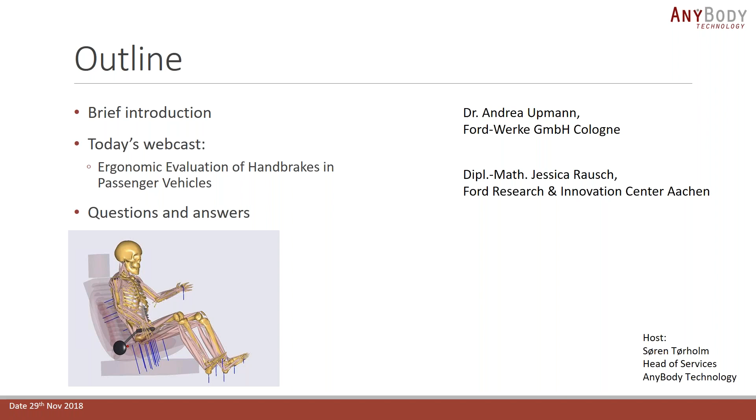But first a little bit of introduction to AnyBody. It's a tool for musculoskeletal simulation, and what goes into this tool is the motion data, the kinematics, the forces. And what comes out is the body loads, the joint moments, the muscle forces, the joint reaction forces - very detailed information on what goes on inside the human body.

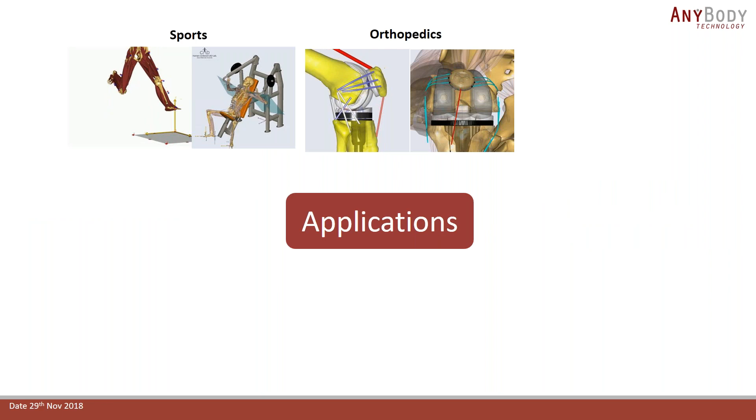And this can be used for all sorts of applications. It can be used in sports, orthopedics, universities. It can be used, as you will see here today, in automotive, aerospace, assistive devices, ergonomics, and consumer products. So really all sorts of fields where, but what in common, of course, is that we do analysis on the human body and its surroundings.

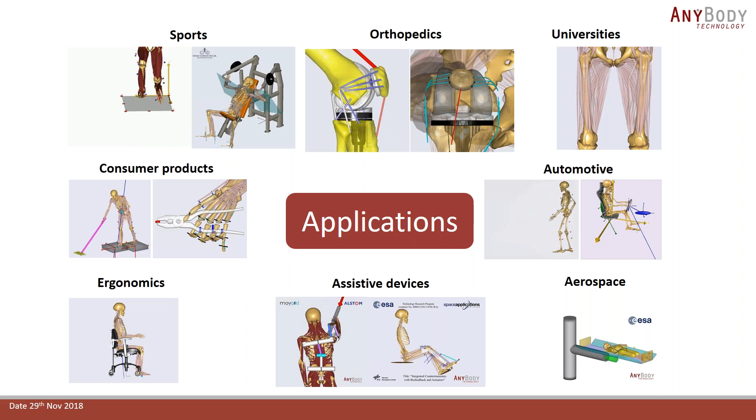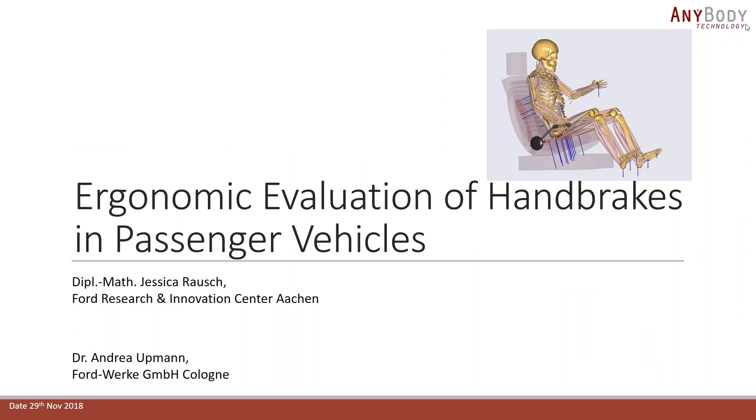Thank you for the introduction. I hope you all can see my screen. In this presentation, we want to show you how we developed a process for the ergonomic evaluation of the handbrake. The project was a cooperation of 3 different Ford departments and the Institute of Biomechanics and Orthopedics from the German Sports University in Cologne. I am Jessica Rausch from Ford Research and will present the first half of this presentation. My colleague Andrea Upmann works in Ford product development and will present the second part. She also wrote her dissertation about this project.

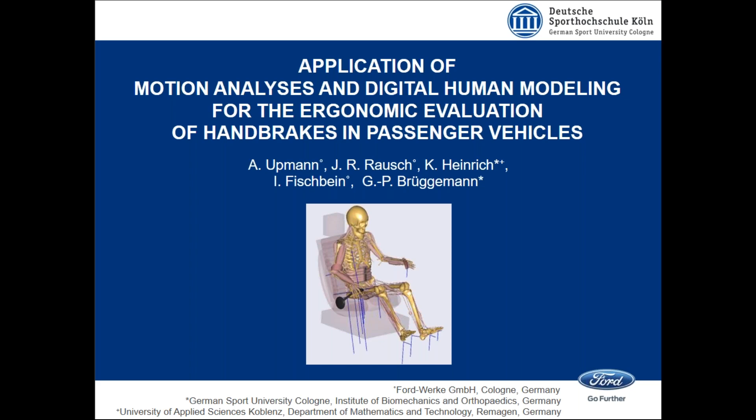So when we talk about ergonomics and comfort, we first have to define what we mean, what we want to evaluate, and how we can do that. We know the perception of comfort and discomfort is very subjective. Especially comfort is something which is connected to design and features, and it's basically not predictable for us. It is also highly depending on factors like preferences and expectations, and it even can change over time.

But we know that discomfort has negative effects on the comfort perception as well, and that's why we always try to achieve very low discomfort. Discomfort is associated more with physical factors like pain and fatigue and biomechanical factors, so this is more feasible to predict or to measure.

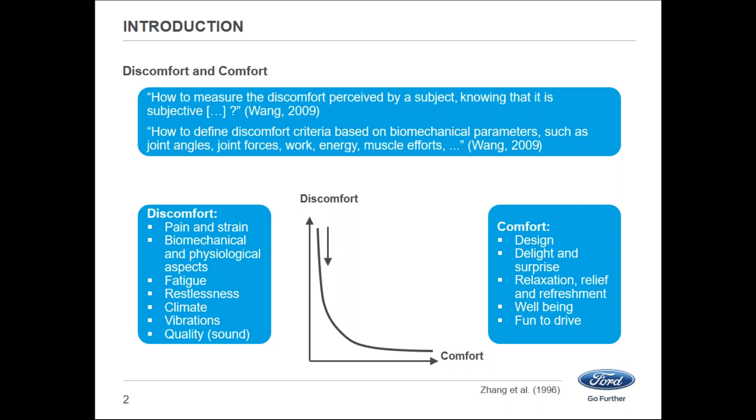And why is it even important for us to investigate comfort and discomfort? The simple answer is it is important for our customers and also becoming a differentiator on the market. So, of course, we try to maximize the comfort by developing new features and minimize the discomfort.

Usually the discomfort assessment for cars is done by studies with subjects, but these studies take quite some time. We need a lot of subjects and we need prototypes, so that's making these studies quite expensive. Objective factors are often really hard to measure, and a lot of stuff we can't measure at all. So we often rely on subjective ratings. But subjective ratings are often not really reproducible and consistent, so we need a lot of subjects and tries to get reliable information.

That's the reason why we would like to have a virtual process using digital human models, which can help us to predict discomfort in early stages of the design process.

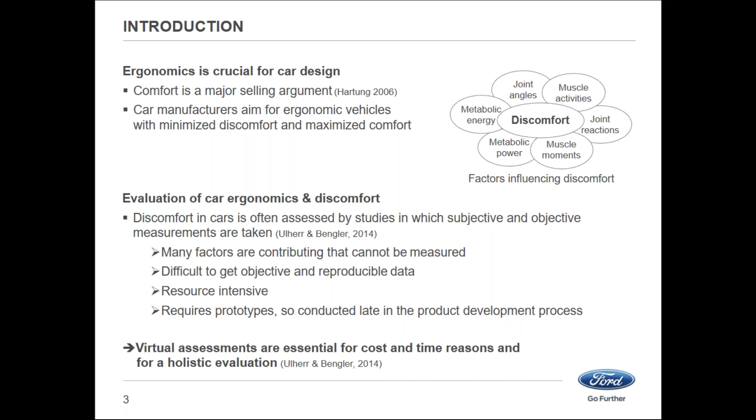And we focused on the handbrake. We are often asked why the manual handbrake. The electronic handbrake is coming into more and more cars. Does the manual handbrake even have a future? We think it has a future, and it is still important for small and low-cost cars, and especially in the emerging markets, we still see a future for the manual handbrake.

The handbrake is located in or near the center console, and this space is really loaded with a lot of different components, and there are more components coming - shifter, armrest, cup holder, storage for the smartphone, USB connectors, and other stuff. So you see there's quite some fight from all these components to get as much space as possible. That's why the handbrake location is becoming more critical, because they are, of course, trying to shift it out as much as possible. So that's the reason why we think it's important to evaluate handbrake position in early stages of the design process.

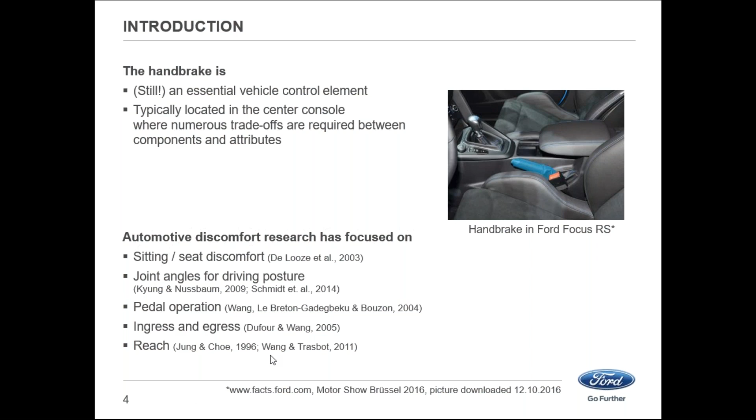In previous research in the automotive sector, the focus was mainly on seat discomfort, joint angles, pedal operation, ingress, egress, and reach, but we could not find much about handbrake ergonomics, so we decided to do this study. Our objective was to develop a virtual procedure which can evaluate the discomfort of a handbrake design.

We needed to identify the factors influencing the perception of discomfort, and we had to look at how people are applying the handbrake, what motions they are using, and if we can simulate these.

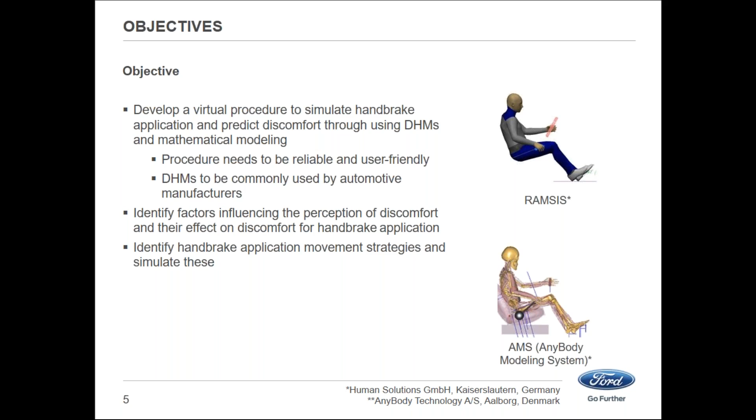So we planned a multi-step study. In the first, preliminary study, we focused on subjective ratings, looking to see if people can feel differences for different handbrake locations, and how people are applying the handbrake and whether there are different motion strategies.

In the second, main study, subjects again rated different handbrake designs, but this time we also recorded the motion and did a motion analysis. Next, a procedure was developed to predict motions with RAMSIS, and this motion was given into the AnyBody model, where we obtained biomechanical parameters, which were used to develop a discomfort prediction model.

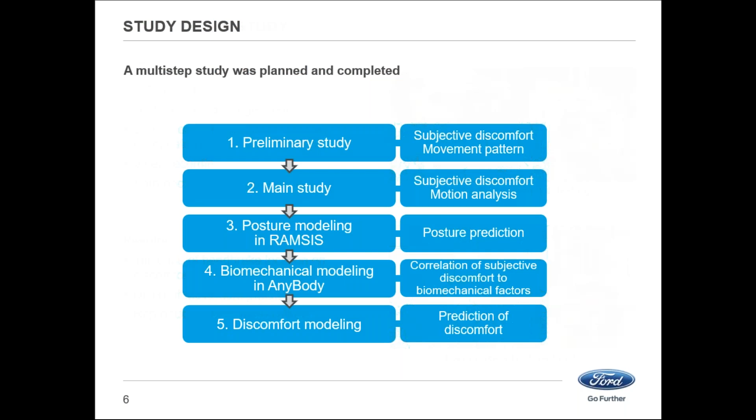I will give a short overview of the pre-study and concentrate more on the main study later. Both the pre-study and the main study were completed at the Sports University in Cologne, which invited more than 130 subjects, and we got complete data sets for 117 subjects at the end.

Participants first made a test drive in a real vehicle so we could find a valid seat position for everyone. This seat position was then transferred into a test rig with the same dimensions as the test vehicles. Subjects were then asked to evaluate 8 handbrake designs at 7 different locations, one repeated, with their motion recorded by video cameras, and we also measured several body dimensions.

As a result from the study, we could see that handbrake location does have an influence on subjective discomfort. We evaluated the videos and could identify different motion strategies, and we could also identify several people who were able to rate reproducibly.

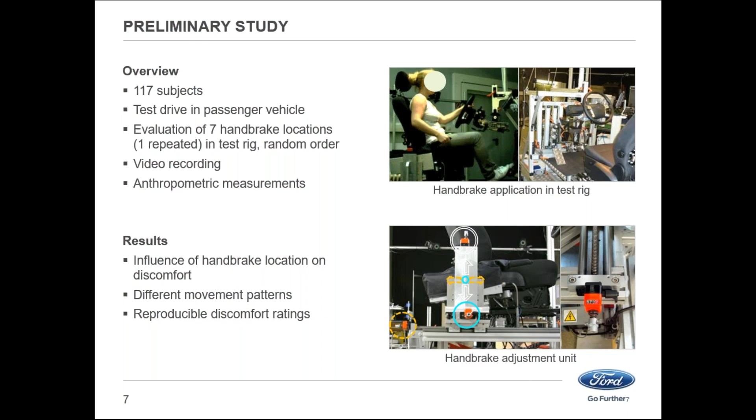Then, in the main study, we invited 40 subjects who had also taken part in the pre-study. These subjects were selected so they cover most of our driver population, and again we asked them to rate 7 handbrake locations in the same test rig, but this time we extended the range of handbrake locations to cover most passenger vehicles.

In the pre-study we focused more on our preferred design space, but this time we extended the design space and also modified the questionnaires and rating scales. In the first study we had several questions, but we found the simple question, how do you rate the application of the handbrake, gave the biggest differences.

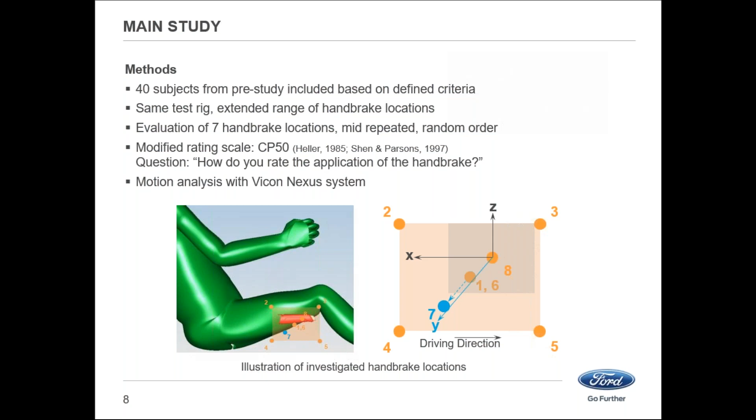This time, the motion was recorded with Vicon, and the handbrake was equipped with force and angle sensors. I will show you a short video here. I hope it transfers correctly and gives you an impression of what we did.

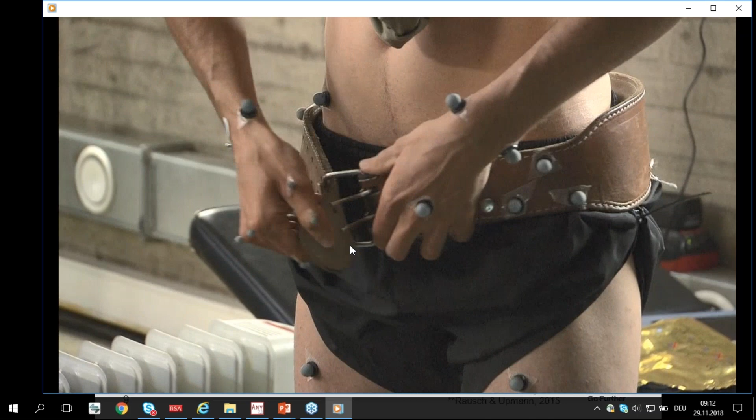You see here, we had markers set up for everyone. We did a calibration motion, which I'll explain a bit more later. Then we had EMG, as you can see here.

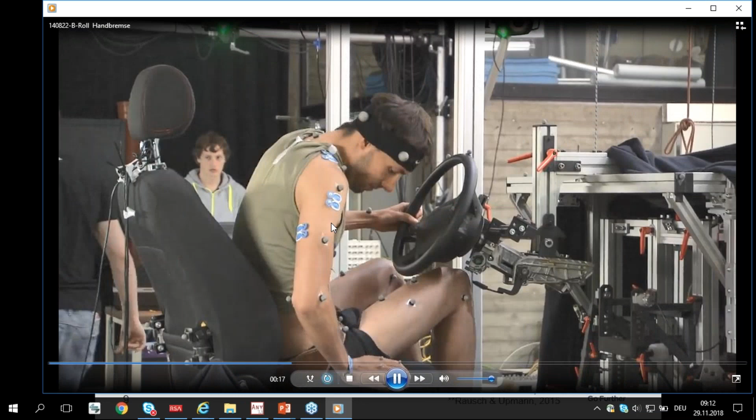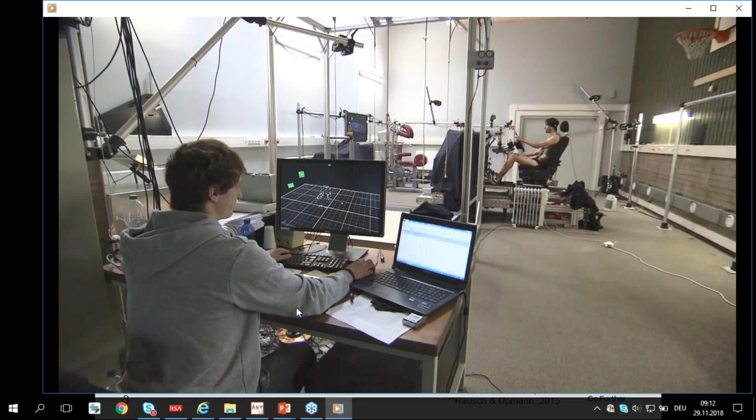We had questionnaires, and here you can see how we changed the handbrake location and asked every subject to apply the handbrake at least 3 times. We recorded the motion and the forces, and they always had to subjectively rate each location. We also did maximum force measurements.

With the results from the marker-based motion analysis, I have to stop the video, it's running. We went into AnyBody and tried to reproduce the motion there, so we could get the joint angles and the motion.

First, we did a calibration motion for every subject with our marker setup. We had a pre-scaled AnyBody model, which was scaled with the measured body dimensions. With the marker setup and calibration motion, we had more markers than later when subjects were sitting in the car, because we also had markers on the back, for example, so we could optimize the scaling and marker setup. This is the calibration motion.

You could also see we had a belt with markers around the hip, because when seated it's really hard to see markers on the skin. There's a lot of skin movement, and the markers are often hidden. So we decided to use a belt which was really tight around the hip, and to get the real position of this, we also used this calibration motion, in which subjects should move every joint at least once.

Each subject had to apply the handbrake 3 times, so we had 3 data points per subject. We could see there was already quite some variation in each of these trials, and also between subjects there was quite some variation.

But what we could see is influence of the body height. The black points are from the start keyframe for the elbow location, elbow flexion, for one handbrake location, and the red points are the end elbow flexion for the same handbrake location.

So the motion was always quite similar for every subject. Applying the handbrake for a certain angle always means a certain elbow flexion. But we also could see it was depending on body height for the start position and end position - small females were more flexed than tall males, for example.

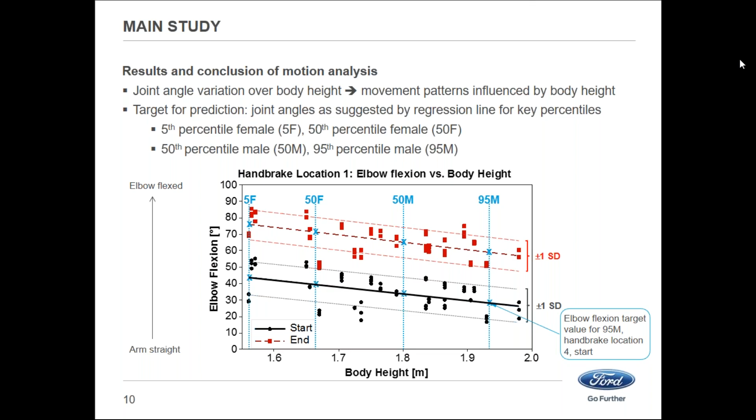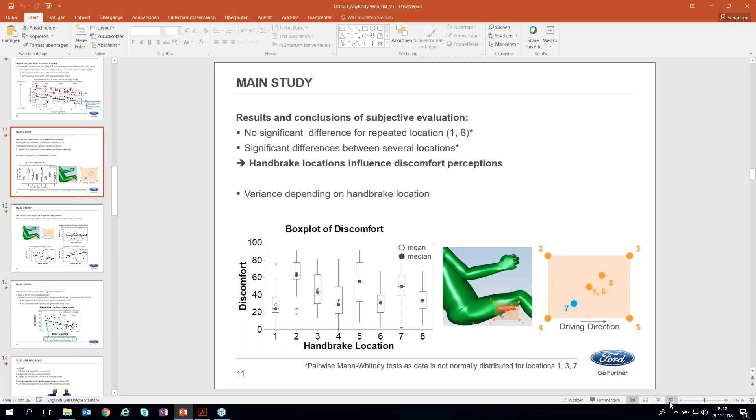Additionally to the motion, we also analyzed the discomfort ratings. What was very important to see is that there was no significant difference for the location which was assessed twice, confirming good reproducibility. But we could see a difference in the rating for different handbrake locations, so the handbrake location influences discomfort perception.

What we can conclude from the box plot is that the variance of the ratings depends on the handbrake location. For example, for the center handbrake locations 1 and 8, there is small variance in discomfort ratings. However, for the lower locations 4 and 5, we see larger variance. One contributor to this is the influence of body height on discomfort perception.

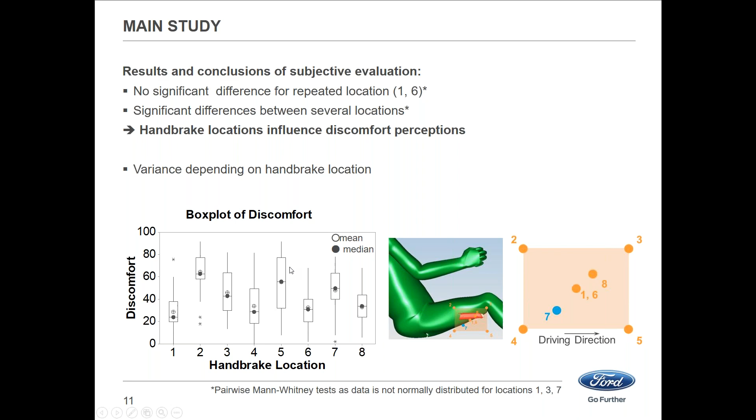This is easy to explain. Smaller people typically sit more forward in the vehicle to reach the pedals, and more upward to see sufficiently. When the handbrake is in a rear low location, they have to apply it in a very uncomfortable body posture - we call it chicken wing posture. For taller people, who typically sit more rearward and lower in the vehicle, they can apply the handbrake in a more comfortable body posture.

For handbrake location 5, the fore-low handbrake location, it's the other way around - taller people perceive more discomfort, as they have to lean forward. For handbrake location 8, one of the center handbrake locations, we do not see a correlation between body height and discomfort.

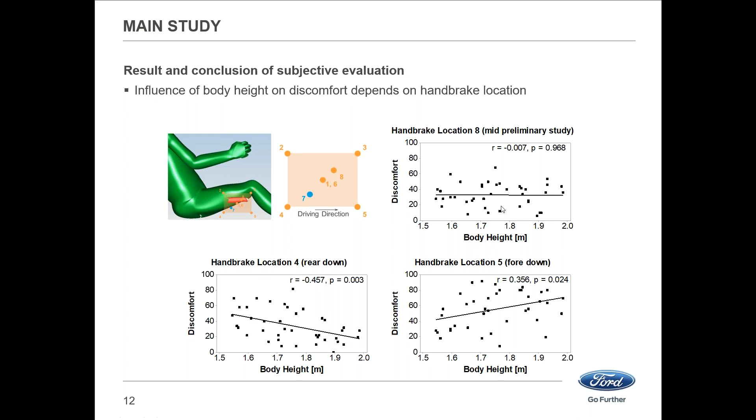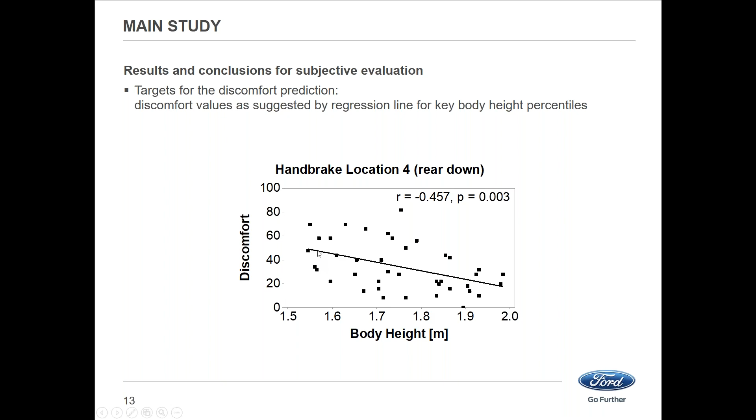Let's focus now on handbrake location 4, the rear down handbrake location. The variance of ratings is large, even for subjects of similar body height. So it does not make sense to predict with our process the ratings of single subjects, and we decided, similar to the body angles, to take the regression line values as targets for the discomfort prediction.

Again, we use the main percentiles: 5th percentile female, 50th percentile female, 50th percentile male, and 95th percentile male. Here, for example, we see the target discomfort value for the 5th percentile female at handbrake location 4.

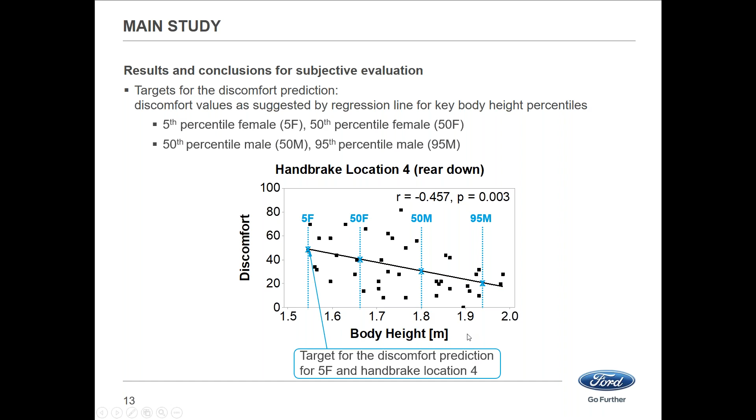The next step was modeling the motion. We used RAMSIS. RAMSIS is a digital 3D model, and it has anthropometric and posture models. There are many anthropometric databases for several countries and regions in the world, and it also offers a wide range of posture models.

For example, car driver posture model or truck driver standing posture model, and those posture models are based on empirical studies. RAMSIS is used by almost all automotive OEMs. For driving related applications, typically the car driver posture model is used, and it worked well for predicting the driving posture, the steering wheel adjustment and the seat adjustment, but for predicting the handbrake postures, it didn't work well.

So we got unrealistic postures, and it seems that the empirical study this model is based on does not sufficiently account for handbrake application. So it was obvious that we would need to develop our own posture models, or new posture models.

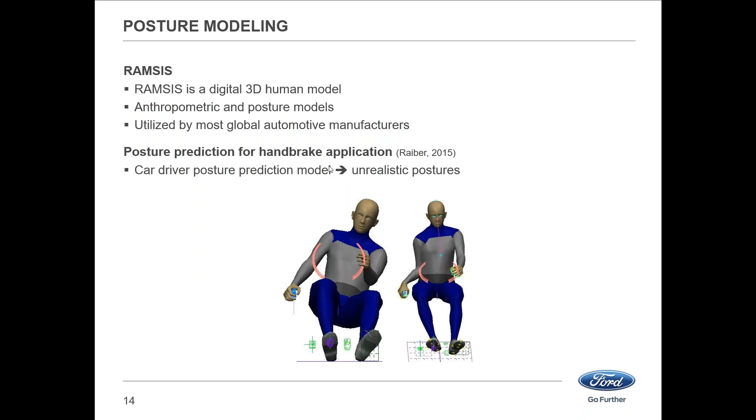Philip Raiber did this in his master thesis. First, he tried to predict the postures with one posture prediction model. This didn't work well, so he developed a posture prediction model for each key percentile.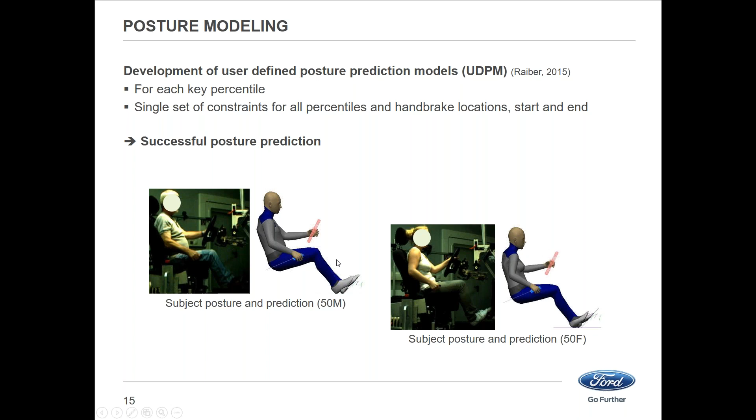The next step was the biomechanical modeling. You probably all know AnyBody, as you dialed into this WebEx, so I will only say a little bit about it. It's a rigid body model, and you can choose from a lot of different models and details.

As muscle model, we have chosen the Any muscle model. In this muscle model, the strength of the muscle does not depend on the actual length and contraction velocity of the muscle.

Why have we chosen this model? One reason is that handbrake application happens at pretty low speed and the muscle length is not extreme. Another reason was that we did some comparison of this model...

...and the 3E muscle model, which is more complex. It simulates the Hill muscle model so that the strength is dependent on actual length and contraction. But in previous studies, we found that for some postures, the Any muscle model was more robust, while the 3E muscle model overestimated the strength of the muscle or the muscle path changed during the motion. So we used the Any muscle model as it was more robust in previous studies.

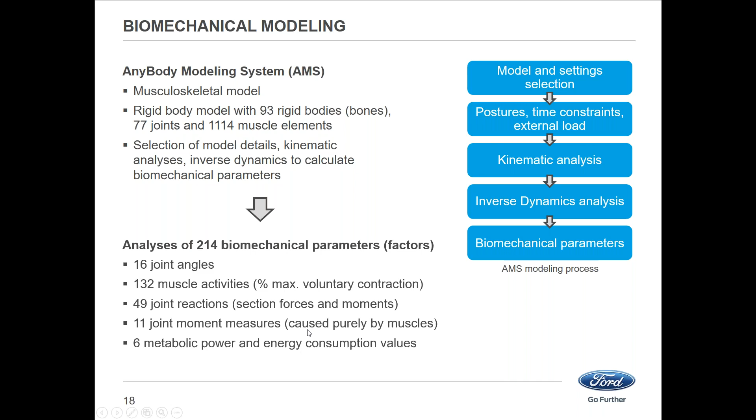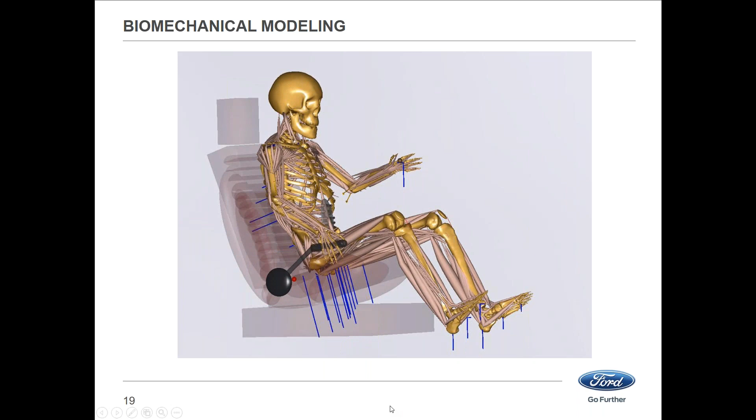So here we see what the simulation looks like. The blue lines are external forces, and muscles which are applied are shown thicker. Now let's go to the next slide.

After that, we did the correlation analysis. We correlated the factors and also their squared values to the target discomfort. We use squared values as, for example, for the body angles it is to expect that squared values will correlate well.

For example, a spine rotation in one or the other direction might increase discomfort, or for other body angles there might be an ideal value for which the discomfort will be low, and for increased and decreased body angles the discomfort will increase. We did the correlation analysis for 3 time steps.

The start time step is when you start to apply the handbrake and your hand is at the handle, but there is no force transfer between the hand and the handle. The second time step is based on the same posture, but this time with force transfer between the hand and the handle. The third time step is at the end of the handbrake application, when you apply the handbrake so that the vehicle holds on a slight hill.

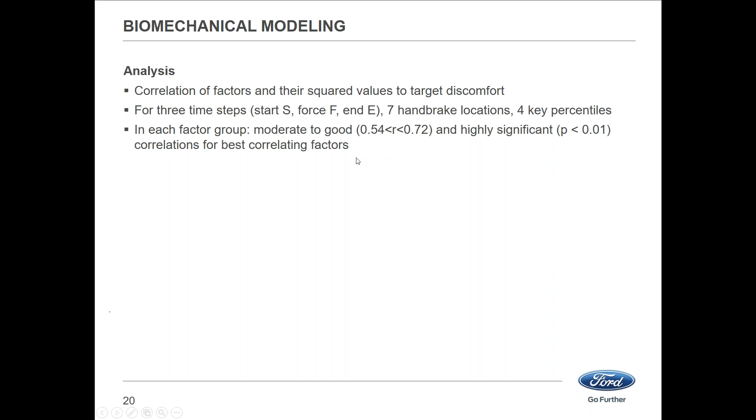We did the analysis, of course, for all handbrake locations and the key percentiles. What was very good is that in all factor groups, like body angles and joint moments, we found moderate to good correlations, which were highly significant. I think this is very good because discomfort is so subjective, and this is the first indicator that discomfort of handbrake application can be predicted using biomechanical parameters.

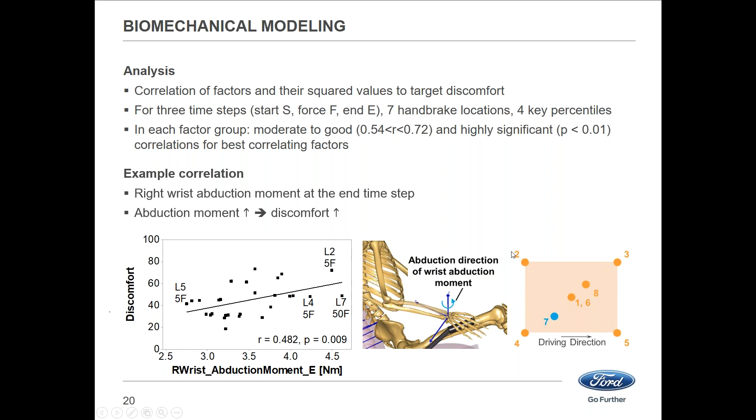I will show one example for correlation. Here we see discomfort versus the right wrist abduction moment at the end time step—wrist abduction is bending the hand towards the thumb. With an increasing abduction moment, the discomfort increases to high values, for example for the 5th percentile female and handbrake location 2, the rear-up handbrake location.

For developing a discomfort prediction model, we used stepwise regression, and with each step we increased the prediction quality and decreased the standard error. With 9 predictors, we had a very good prediction quality—we could explain 96% of the variation in discomfort. The standard error was 3.5, which is very good compared to the absolute difference of the location assessed twice, which was 3.9.

Unfortunately, we do not have time to discuss every predictor in detail, so I will summarize. The first 89% of the discomfort can be explained by the first five predictors, all from the end time step—joint reaction, joint moment measures, and joint angles. The last four predictors become especially important for combinations of handbrake location and key percentile that lead to unfavorable start postures; they are all from the first two time steps, the start and the force time step.

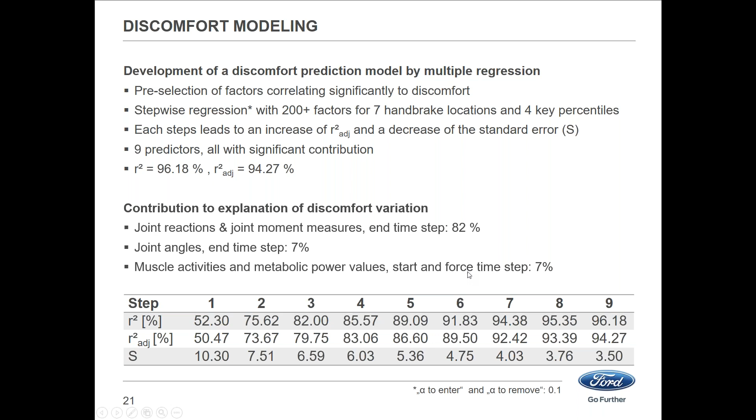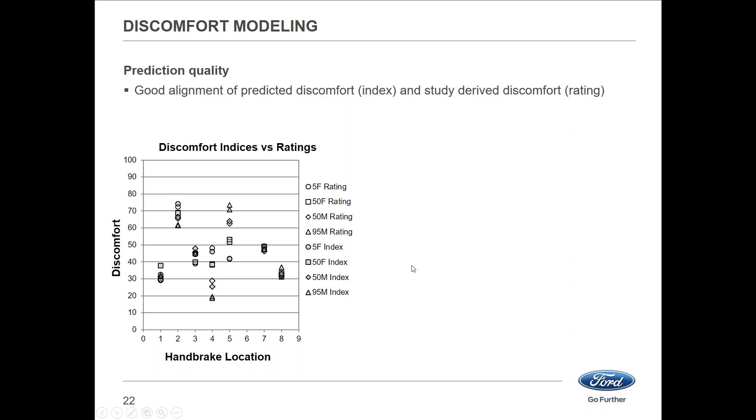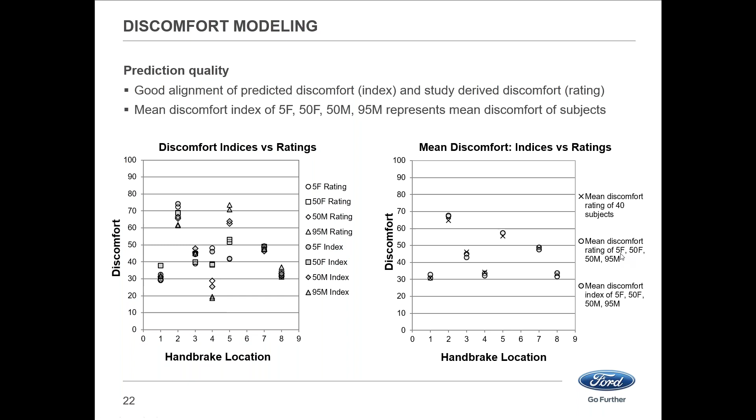On this slide, we see an overlay of the ratings, shown not filled, and the predictions, shown with gray filled symbols. For all handbrake locations, the predictions are well in line with the values derived from the study. Also interesting: the mean rating from the 40 subjects can be predicted with the 4 percentiles based on the regression. So we can predict the group discomfort with the mean of the 4 key percentiles. With this, we now have a procedure for prediction of handbrake application postures and discomfort.

The geometry of the vehicle and the handbrake are used in RAMSIS to predict the postures for the 4 key percentiles. With these postures, in AnyBody, the biomechanical parameters are calculated, and with this we can then calculate the discomfort for the 4 key percentiles and compare different handbrake variants.

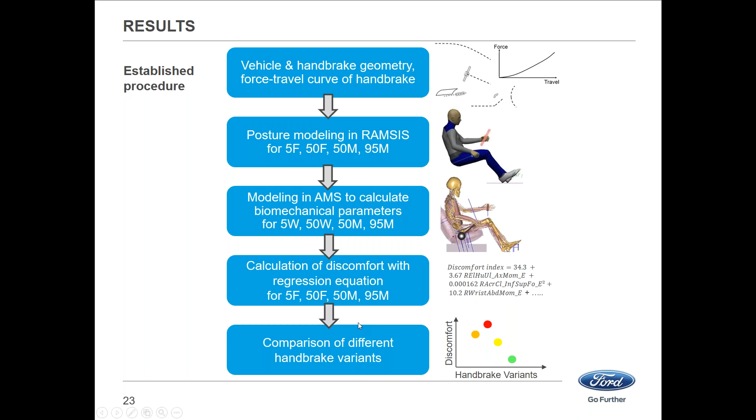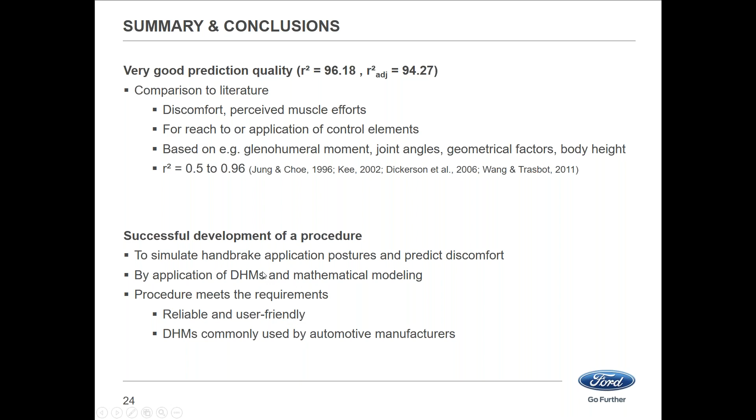To summarize, the prediction quality is very good—comparable to or even better than most similar studies in literature. As Jessica mentioned, we didn't find much on handbrake discomfort specifically; most similar studies were based on reach or application of other control elements. We were successful in developing a procedure to predict handbrake application postures and discomfort, meeting both requirements specified at the beginning: that it's reliable and user-friendly, and based on digital human models available at automotive manufacturers. Yes, the model is ready to be applied.

What we can conclude from the limitations of the study suggests potential future research topics. It would be interesting to see to what extent the results can be transferred to other populations, other handbrake designs, or other control elements. It would also be interesting to find out if additional parameters could increase the prediction quality or reduce the number of predictors for discomfort—such as the shape of the handle, the influence of armrest design, or the interface pressure between the human and its environment.

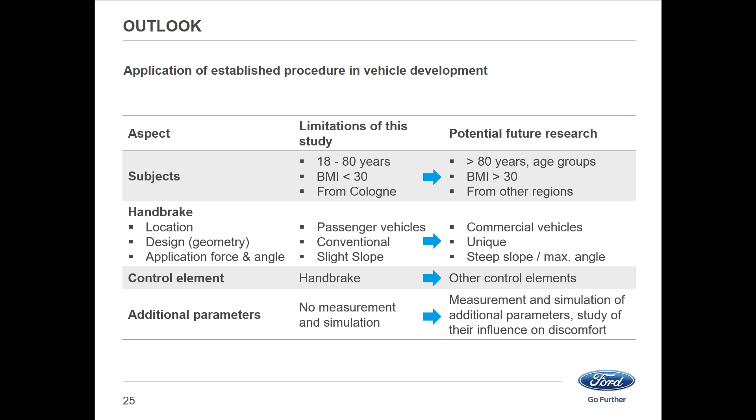With this, I would like to thank you for your attention and give back to Sören now. Yeah, thank you, Jessica, for this very nice presentation. I will now take back the presentation role.